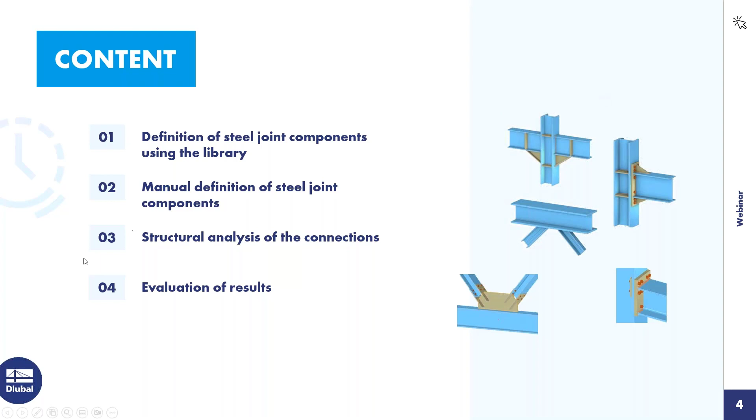For today's content, I will define steel joint components using the library, then define steel joints using components for flexible modeling of a joint. Then the structural analysis: I'll describe the analysis settings, and evaluate the results, for example taking a look at the submodel and the formulas. Then I turn to the program, RFEM 6.

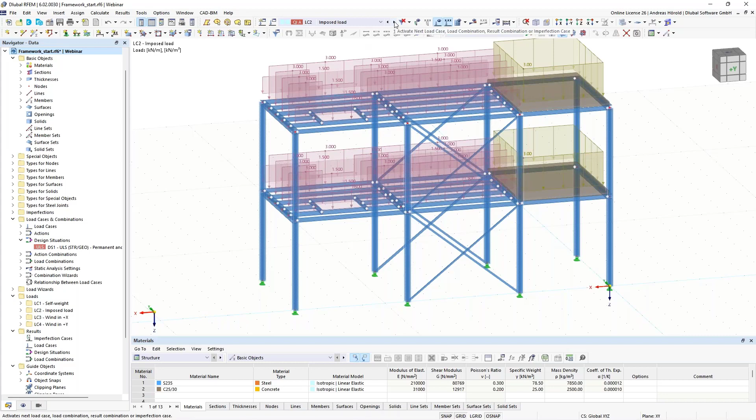A simple model: a framework with frames in that direction and bracings in the X direction. We have several load cases, for example the self-weight load case, the imposed load, and two wind load cases, one in X direction and one in Y direction. We also have several combinations and a design situation.

To design the steel joints, I have to activate the add-on here, left above, under base data. I open the dialog and under add-ons it's already activated, from my test. The standard is also already set here for the load case classifications and the standard and national annex, in this case for Germany, for the steel joint design.

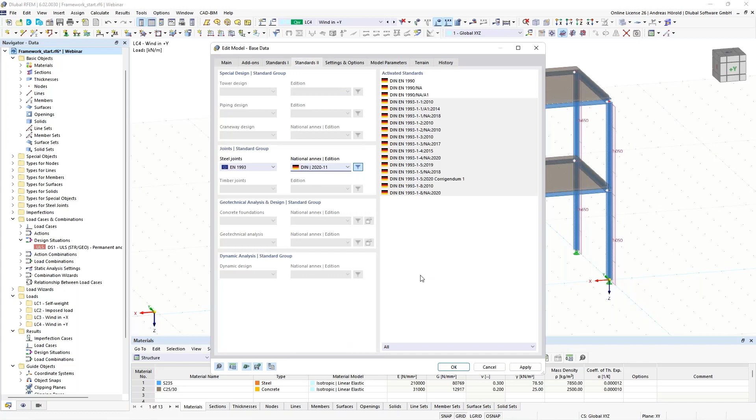Once the add-on is activated, there are two new folders: the types for steel joints, for the creation of the steel joints, and at the bottom, the steel joint design with design situations and ultimate configurations. I will show you that component, the ultimate configuration, in the next dialog.

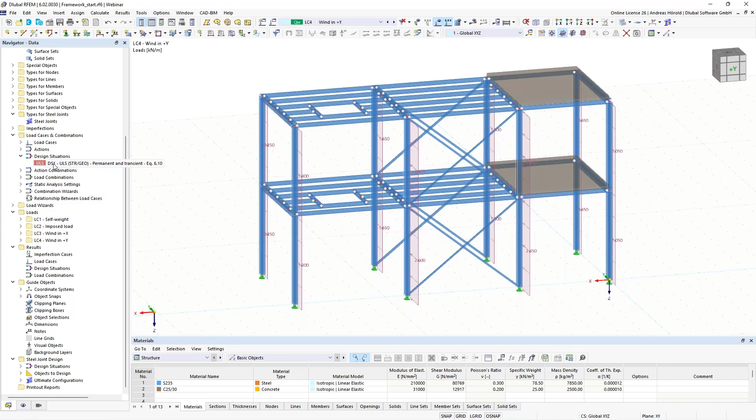Before that, I go to the design situations. You can see the load cases here, the actions, and the design situation. It's important: if you activate the add-on, by default the steel joints design is activated. Just note that it is here.

These are the action combinations and the load combinations, and those load combinations are included in the design situation. You can see that here in the overview.

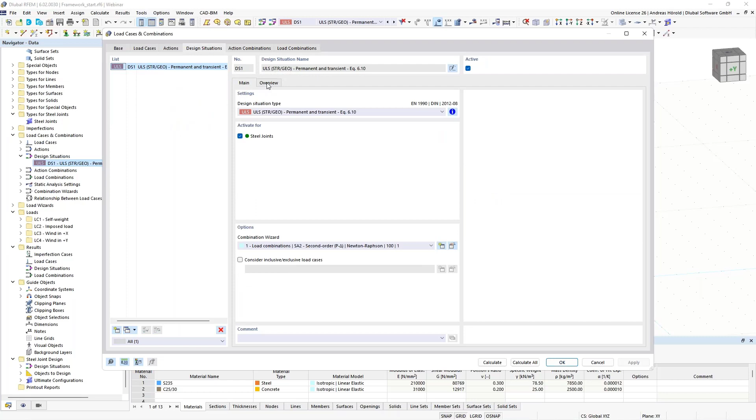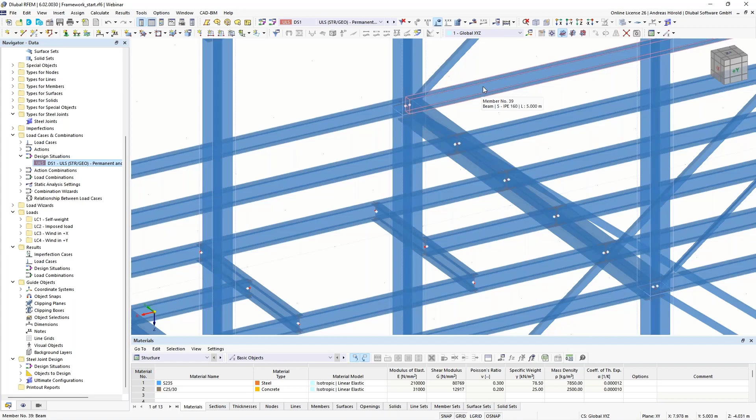So we can leave the dialog and start with the first steel joint. Let me show you that in the model. I would like to use this node, and I will define all connections for it: the rigid connection of the steel frame, the pin connections of the platform beams, and the two connections for the bracings, which are L sections.

Let's start. Right-click on steel joints on the left side in the navigator data, and select new steel joint. First I select the joint, the node, sorry. Node 33, and I apply that. There are 7 members that have their end or start point at this node. We can click through them.

Member 1 is the platform beam. That's the bracing, the frame or horizontal beam of the frame, the upper column, the lower column, the other platform beam, and the upper bracing.

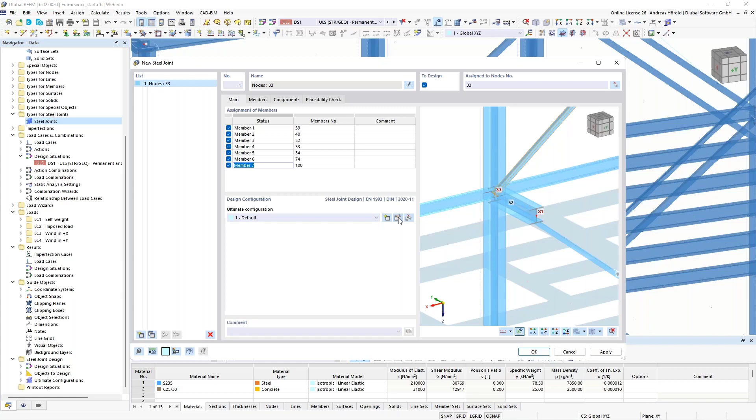Here you can see the design configuration. I open it - you can perform a buckling analysis. Then you can see the standard settings here, the maximum number of iterations, which you can increase. You can also increase the number of load increments.

That's the standard setting for limit plastic strain, that's the value from the standard, and so on. I leave all settings as they are, also the safety factors here.

If you want to perform a buckling analysis, you can go to that dialog. You can also increase the number of lowest eigenvalues and number of iterations. That's the limit load factor from the standard, it's 15 according to the Eurocode. For these connections, I don't do a buckling analysis.

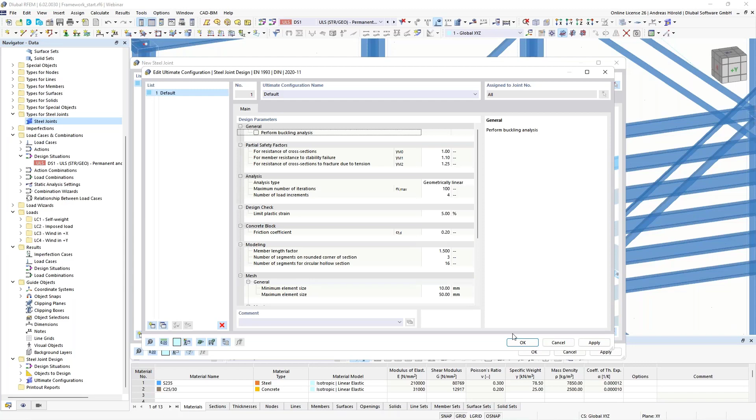Okay, then we go to the next dialog, members. The finite element analysis requires at least one member to be supported.

I select the lower column. The column is in reality supported here, and I will support at least this column. We define also that the column is continuous, and that's automatically overtaken for the two columns.

So the member settings, you can see here the member settings from RFEM, S235, and the sections, and we overtake the sections, of course.

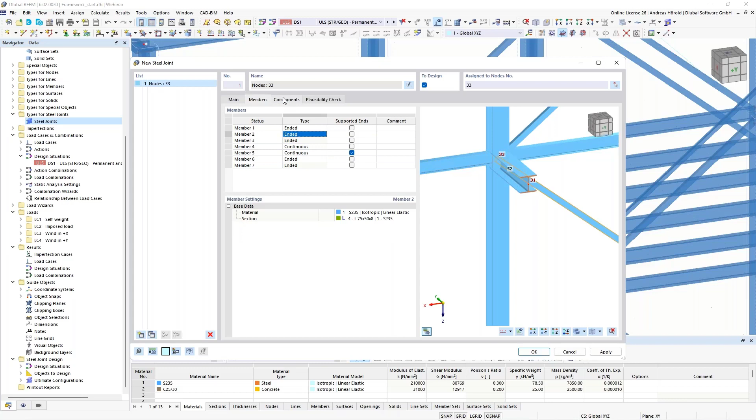So then under components, you can use the library and you can create single components. I open it. You can see 4 categories.

The modifications: member cut, plate cut, we will use both of them. Then the plate editor: plate, stiffener, haunch, and so on. Then under connection elements: end plate, fin plate. Under others: the auxiliary plane, a help plane, then the welds and the fasteners.

Yeah, that's the current state of that library. We will extend that library continuously. A team of 8 members or employees are working on the development of the add-on steel joints.

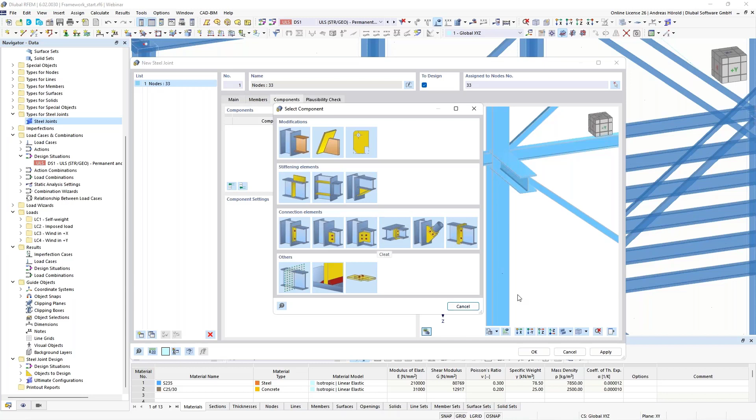We also extend the templates. I go to the template library. So there are also 4 general categories: the rigid connections, the pinned connections, truss, and the bracings.

I click through some examples: beam to beam, beam to column, with haunch, such a connection. If you download a trial version or you already bought the program, you can click through the single components. Maybe a cross joint.

Okay, I will show you some pinned connections: beam to beam with cleats, fin plate, short end plate, beam to column, the same, cleats, fin plate, short end plate, and so on.

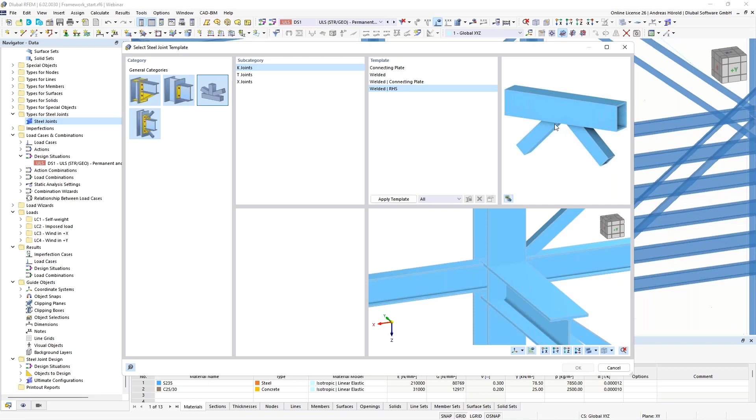Trusses, you can use that for diagonals or for bracings. The K-joint, welded, such a connection. Also for bracings to use welded, it's quite new. The rectangular cross sections with a weld, T-joints, X-joints, and so on.

Then last but not least, the bracings. Similar connection, such a connection.

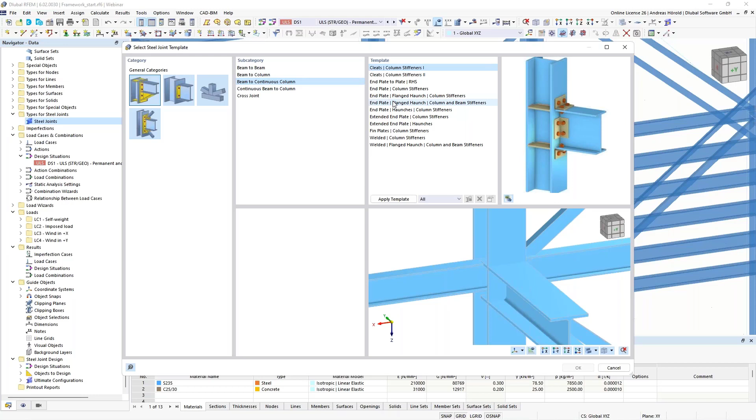But we will start with the first connection, the rigid connection. I use here the category rigid, beam to continuous column, and this one with a haunch and column stiffeners. If I apply the template, we will see it in the preview here right at the bottom. And you can see we have to modify that connection. We leave the dialog with OK.

And we go through the single components. So I extend the window a little bit. Okay, so then we start with the end plate.

Member 3 is okay, you can see member 3 is selected if it is chosen. Then the reference member is the column, you can see it's selected.

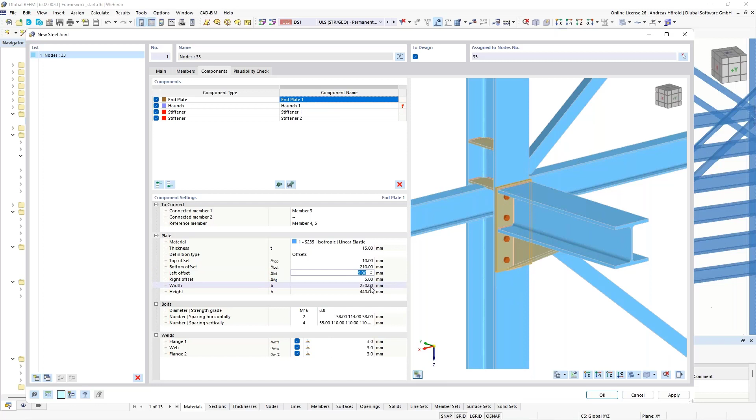We use a thickness of 15 millimeters, then 210 millimeters bottom offset. We don't need an offset, we say 0. On the other side also 0. The rest is quite okay.

So then the bolts, we use a diameter of 20 millimeters and a screw strength of 10.9. So then you can use our values here, it's quite okay for this connection.

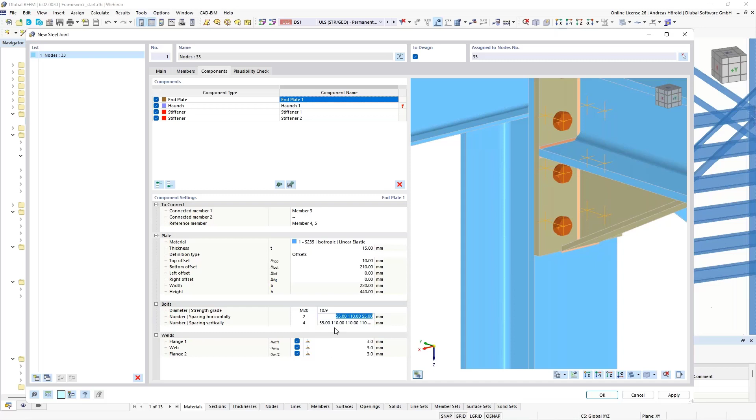I will only change the vertical spacings. I use only 3 bolts, and I only entered the first 3 values: 70, space, 95, space, 150, and the last dimension is calculated automatically.

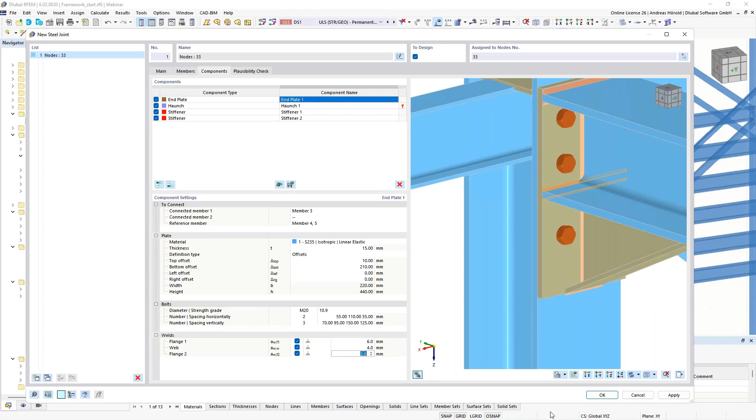Okay, then double fillet welds for the flange, 6 millimeter, then 4 millimeters, and also 6 millimeters. Okay, now you can see we have to modify the haunch. That's the next step.

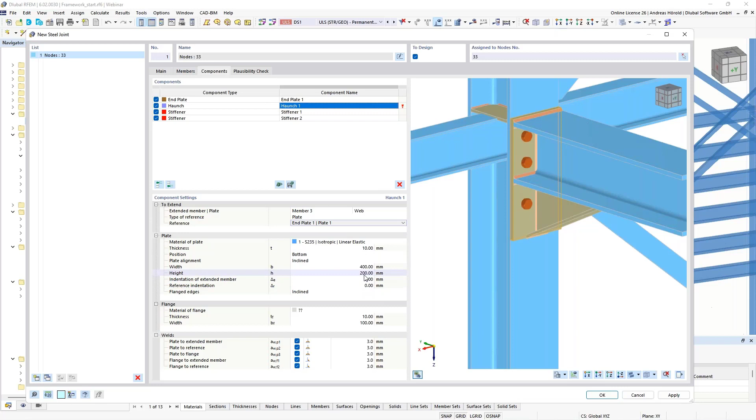So member number 3, that's okay. So then plate is also okay, and plate 1, that's okay. So the other values are also quite okay. I decrease that value, okay, and you can see now it's okay.

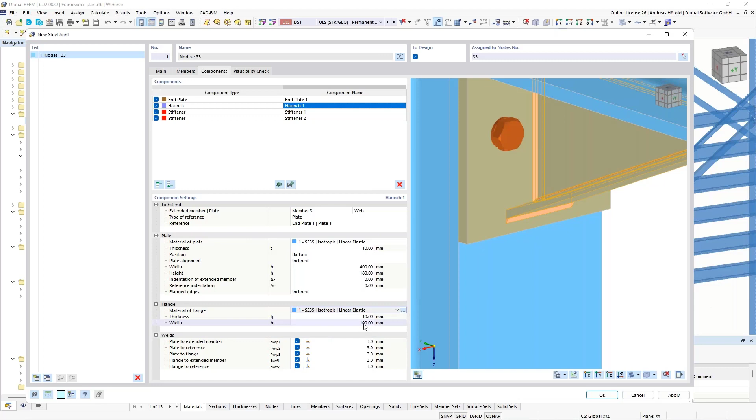So then I have to define a material for the flange, we use also the 235 steel. So then the width can be larger, 200 millimeters in that case.

So then the welds, that weld here, you can see it's selected, 4 millimeters. Now we can leave the double fillet weld. Then this weld also, the double fillet weld, 4 millimeters.

Then plate to flange, this one, also 4 millimeters. So then the flange extended member.

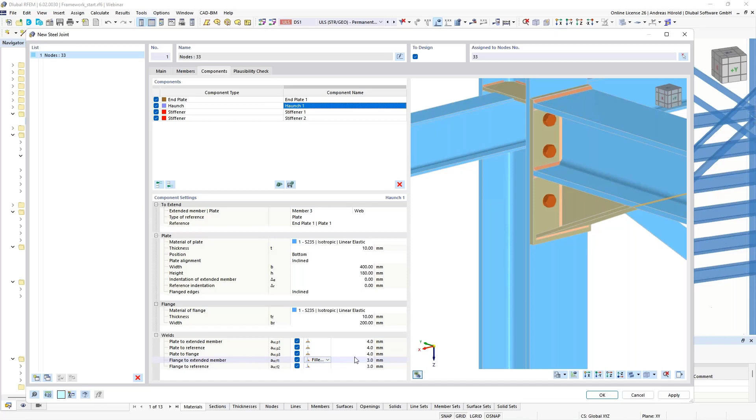Now this is this one. We use another weld, a butt weld rear side. And for this flange to reference, this weld, we use a double fillet weld. Okay, and 5 millimeters.

Okay, so the haunch is quite okay, but the stiffener not. So that stiffener should be quite okay. Let me check the values. Yeah, okay, I only defined a weld of 4 millimeters. But we have to move the upper stiffener here.

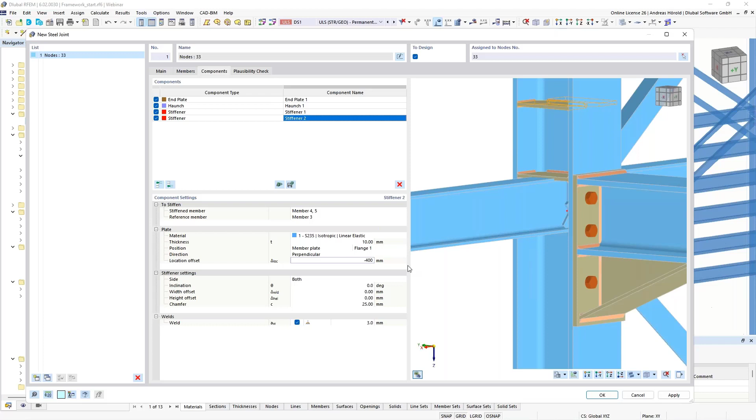So the value is minus 400. Okay. And I also have to change the weld. Okay, the rigid connection is finished.

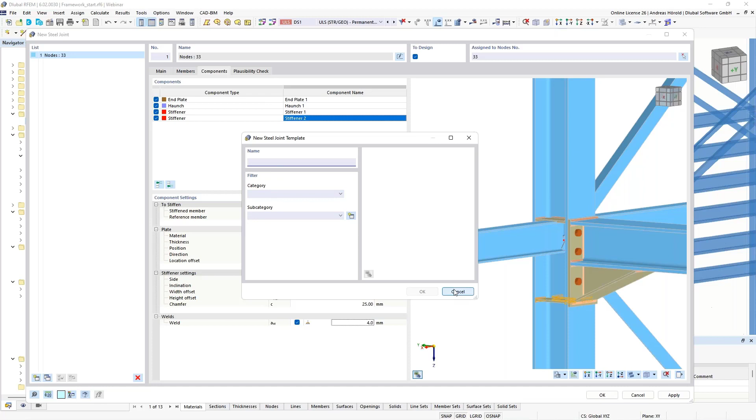And yeah, it would be possible to save it as a template, for example, to use it for the other rigid connections for the frame, for example, on the edges of the framework. And then you could press that button here, save component as template. You can give it a name, select the category and subcategory, and so on. Okay. I don't do that.

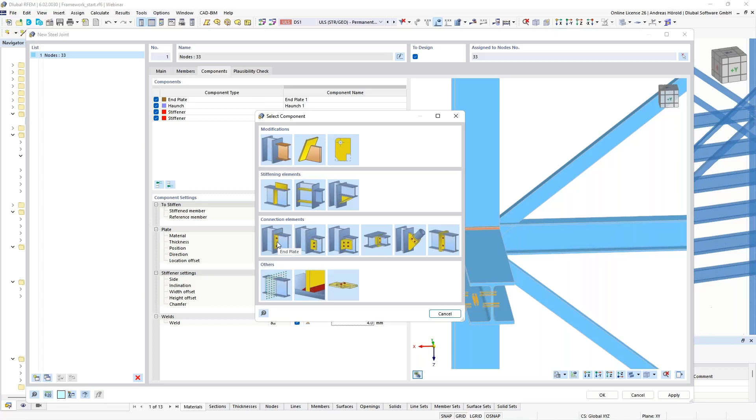I continue with the connection of the platform beam, of those beams here. So that's why I use a component at the end, an end plate, this one, end plate. So connected member is member 1, this one. And the other connected member is the member on the opposite side. It's member 6. And the reference member is the column, that's members 4 and 5.

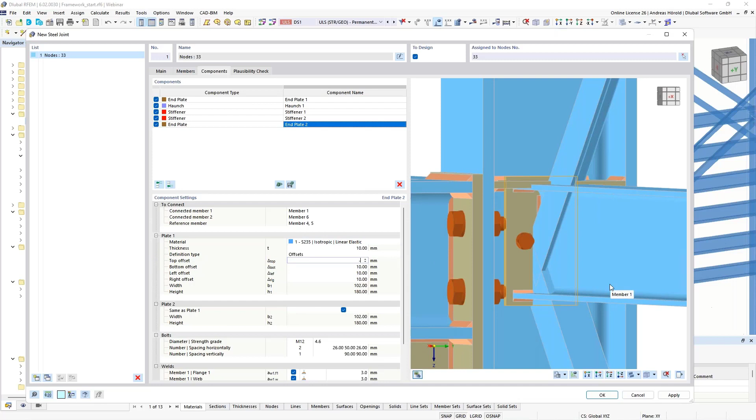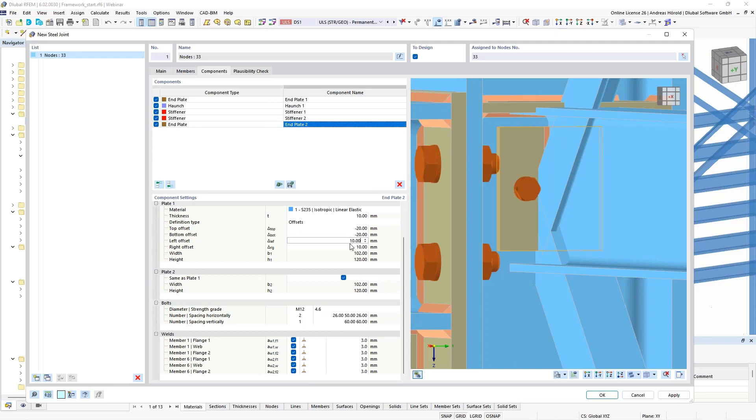Okay, now you can see the end plate. So same material. I decrease that value here. Now we don't want to connect the flanges. Also on the lower side, -20. Okay, the rest is quite okay. The opposite plate should be the same. It's on this side. Yeah, you can see it here. Okay.

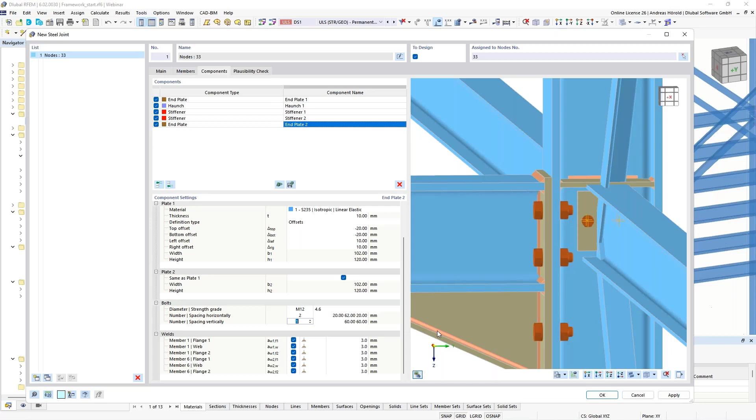So then bolts M12, it's okay. 4.6 as screw strength, it's also okay. Then I enter the value 20 and the rest is calculated automatically. So then I use also 2 vertically and enter the value 35. That's good.

So then we turn to the welds. We don't connect the flanges. Yeah, that's why we deselect our flanges. Only the 2 webs should get a double fillet weld. And the value is 4 millimeters. Okay. So, and now the 2 end plates are finished.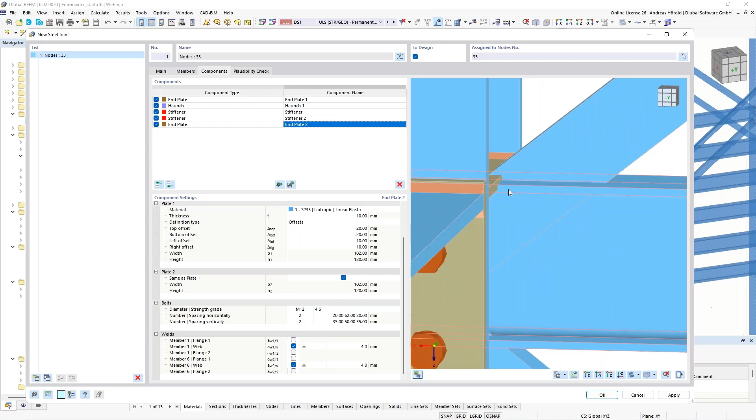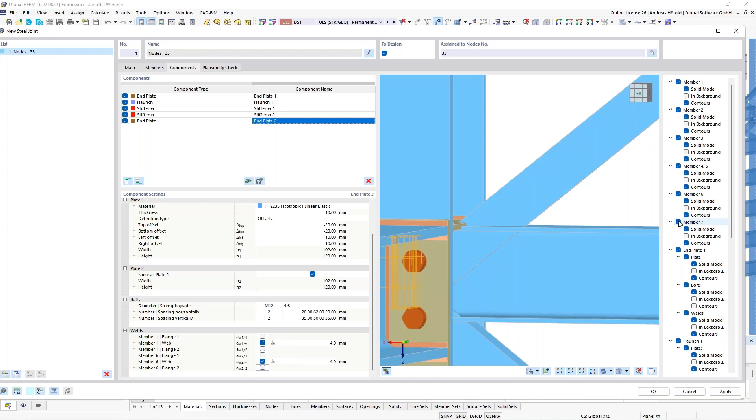Not yet, sorry. We have to add a cut here. Yeah, it's in conflict with that plate here, with the plate of the rigid connection. To get a better overview, with that button here, right at the bottom, I deselect member number 7. Okay. Now it's better to see, I think.

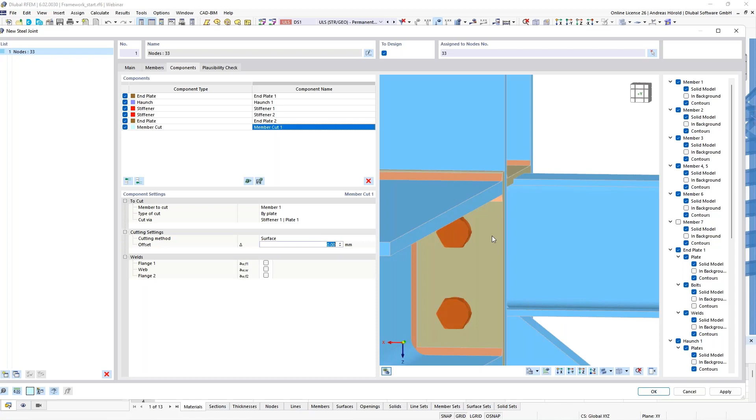So I add a member cut. Which member? Member 1 by plate. And cut via stiffener 1, plate 1, that one here. Okay. So surface with an offset of 15 millimeters. And now you can see the cut.

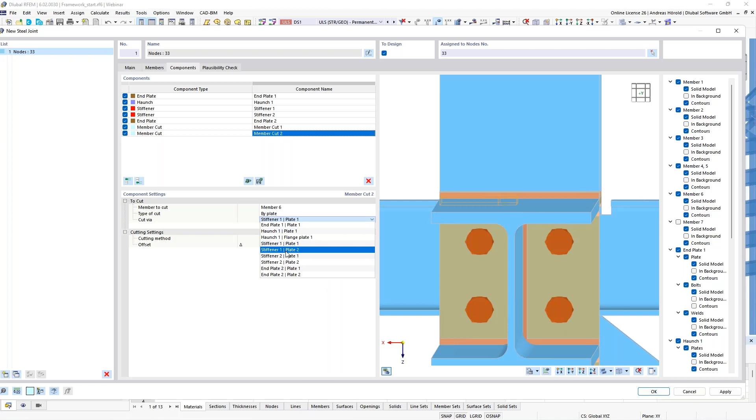Okay. To have it on the opposite side, I can copy that. That's also a new feature. By right-click, I copy the components at the end, only this one component. And I have to define another member. In that case, member number 6, the left side. And the cut is via stiffener 1, plate 2. So you can see it.

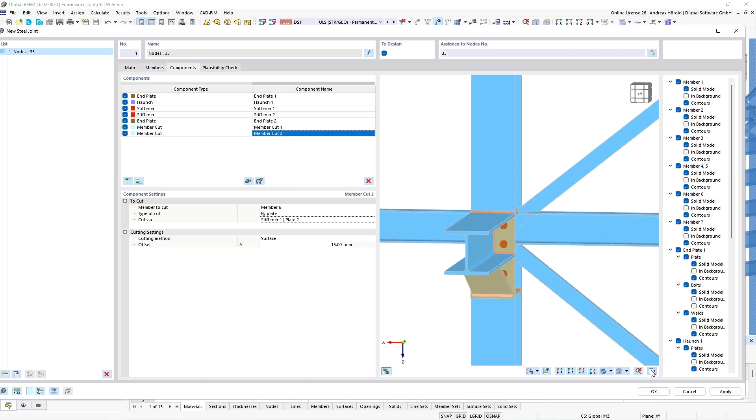So now the rigid connection is created and also the pinned connections, and we continue with the bracings. I select number 7. Okay, I can close it to have a better overview. So, since we don't have this component in the library, I have to create it with the single components. It's a little bit more complicated, but you can see now that it's very flexible. You can define almost all connections with the single components.

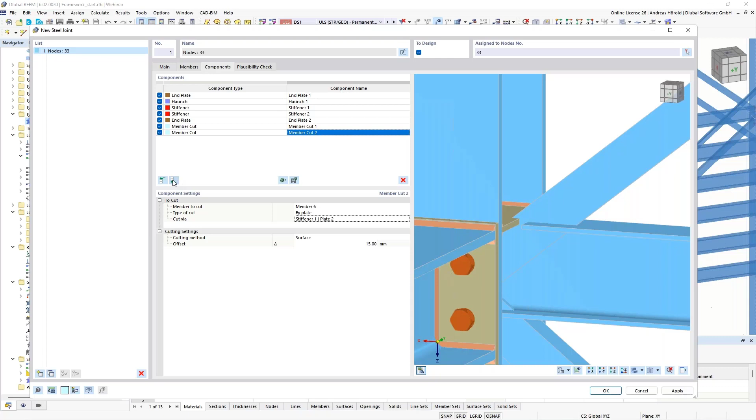So I start with a plate, stiffening elements, plate. So the material is S235 again. The thickness should be 8, then 250 and 170. And the position should be a member plate. And that's member number 7 and leg 1. And you can see it in the preview on the right side.

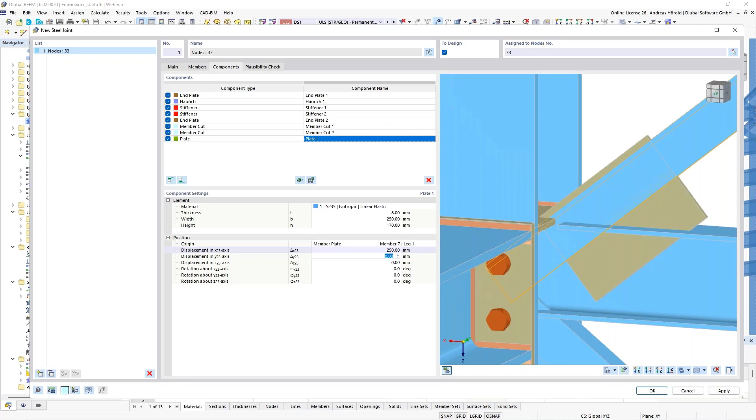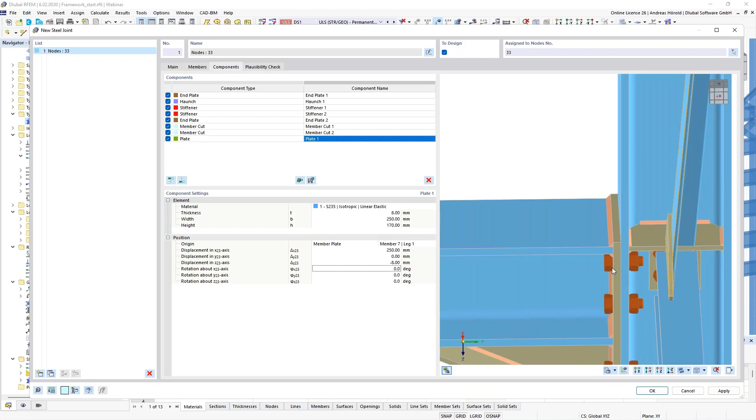Okay, but I have to move it a little bit. I use 250. Okay, and to have it on the side of the leg, I enter here -8. That's the offset of 8 millimeters. And you can see now it's not in the axis of the platform beam. That's the difference between the static model and the connection model. The axis of the L section is here, and the axis of the horizontal beam here, and the plate now has an offset.

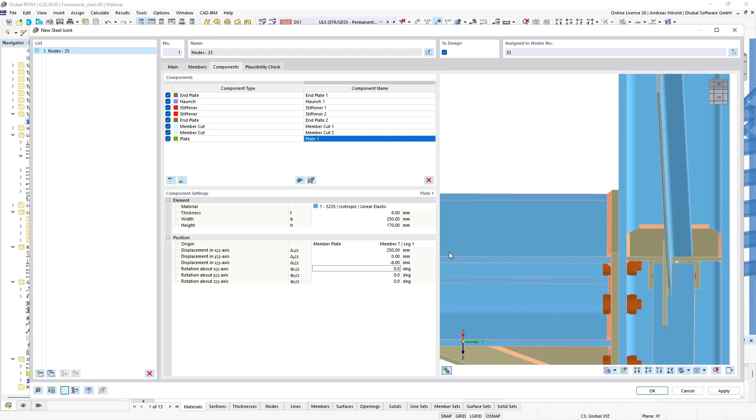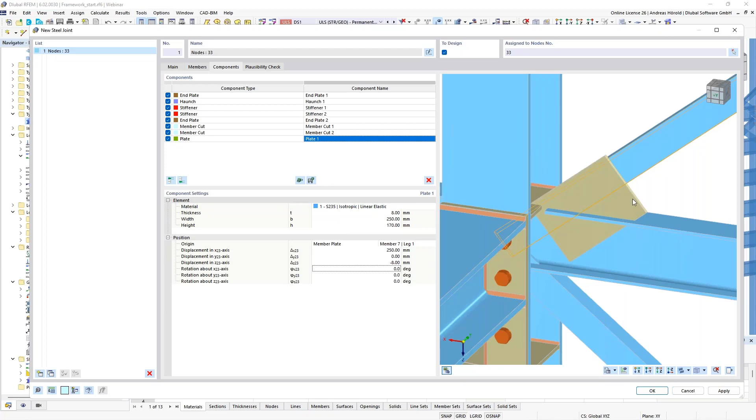You can avoid that if you define an eccentricity for the bracing in the FE model, or you can ignore it for the steel joint design. I ignore it for the steel joint design. It's up to you how to use it. That's the difference between the axis model in RFEM and the detailed connection model. Okay, the plate is not finished. We have to enter cuts.

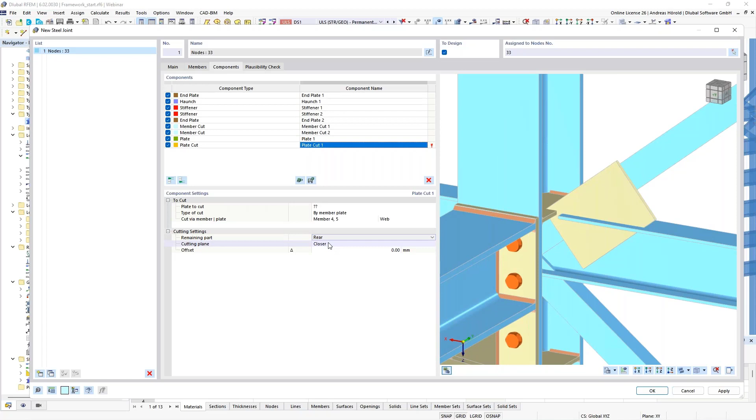I enter this plate cut. The plate is number 1. By member plate. Cut via, I select the column, and the web of the column should be the reference point. Okay, the rear side, closer end is the cutting plane. So we can do it step by step.

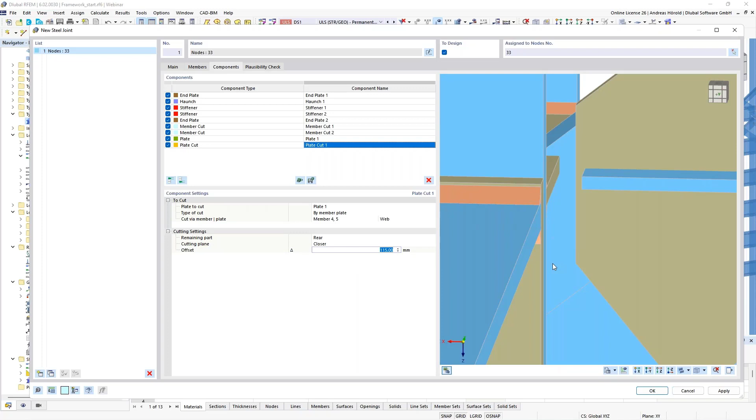No, that doesn't. It doesn't take the plate number 1. Okay. You can do it step by step, or calculate which is the right place. I would like to have the plate cut here at the end of the member cut, and that's 120.25. Okay, this cut is quite okay.

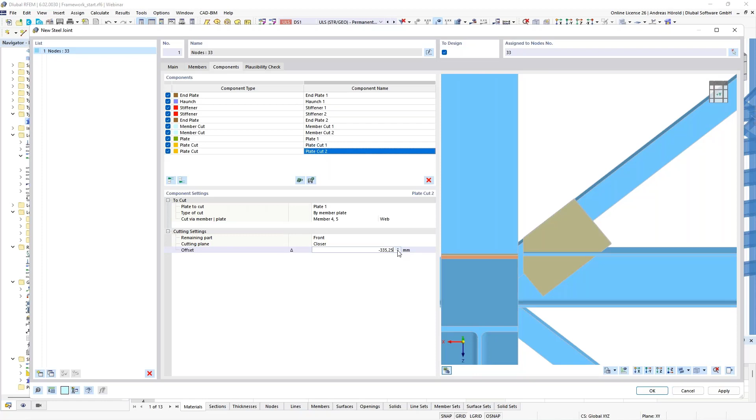We enter a new cut. So again, plate number 1 by member plate. That's the same again. Member 4 and 5, and the web. That's the reference point. Front, the closer end, and I enter minus 335.25. Okay. Only one cut is missing.

Plate cut. Again, plate 1. So now by member plate. And this time member number 1. You can see it selected. And the upper flange, flange 1. Okay. The rear side. Yeah, and that's all. I only have to enter a double fillet weld of 4 millimeters.

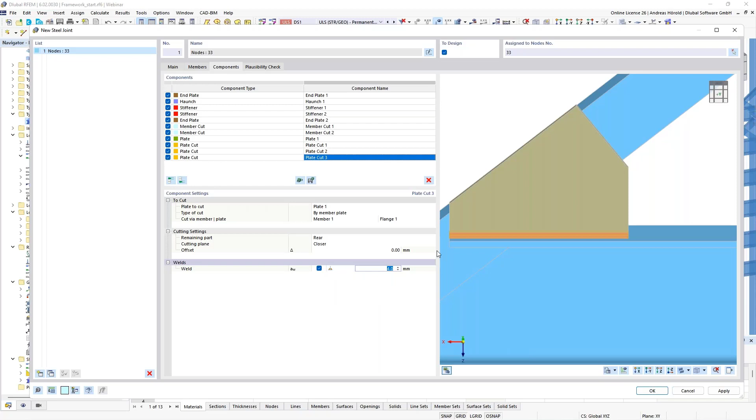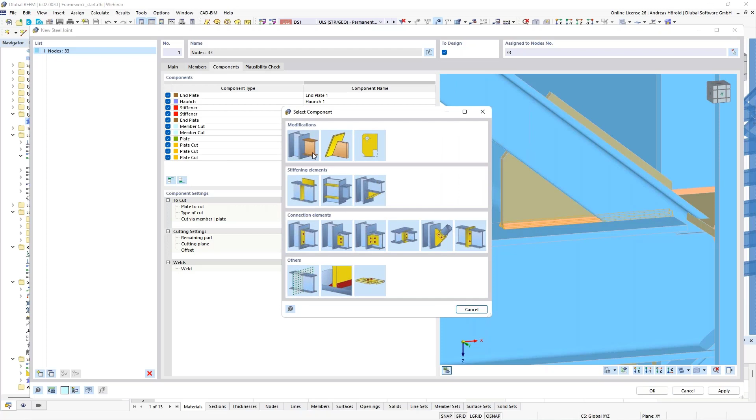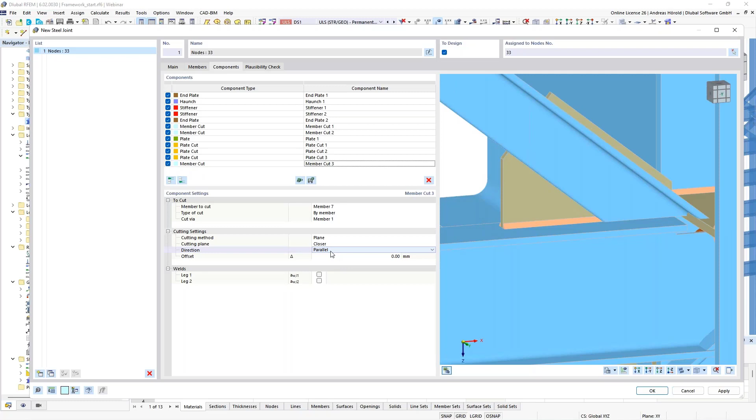So now we have to cut the member. Yeah, you can see it's in conflict with the other parts of the connection. So I enter the next component. Here left above a member cut. The bracing is the member number 7. By member number 1. That's the platform beam, yeah, the horizontal beam. Then it shouldn't be parallel but perpendicular. And a small offset. Okay.

So now we have to define the bolts, meaning fasteners. I add the component fastener. The component is member plate, member 7, leg 1. The other component is the plate number 1. So that's okay.

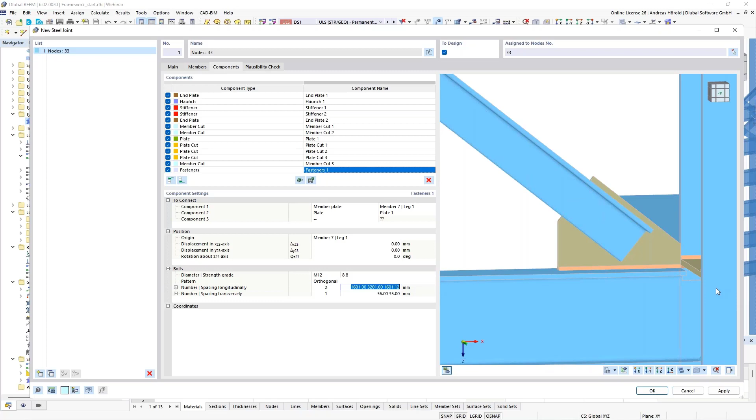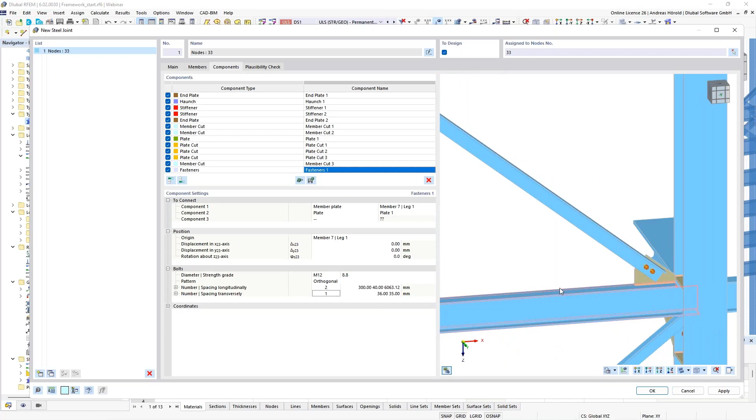M12, I use another screw strength. You can decide by yourself. I, for example, use 8.8 this time. So, and that's the distance from the crossing here. 300, then space, and the distance between the screws or bolts should be 40. And that's all. And now the connection for the upper bracing is finished.

For the lower bracing, we use the same function. I copy that. So I copy the last 6 components. I select all. Then I do right click and copy components at end. So now it's the same, the same connection, and I have to modify it. So that's plate number 2. I start with plate number 2.

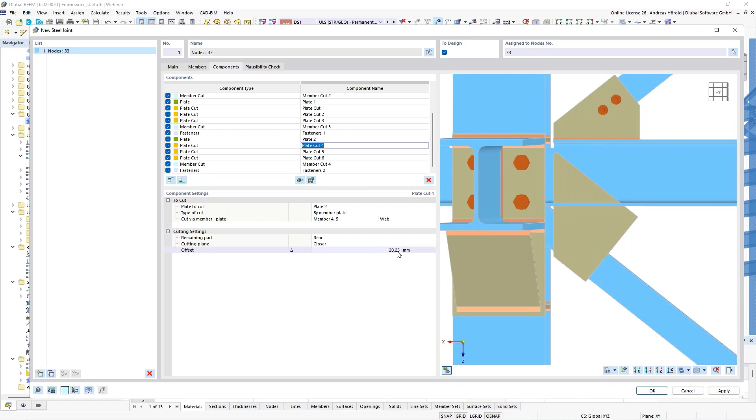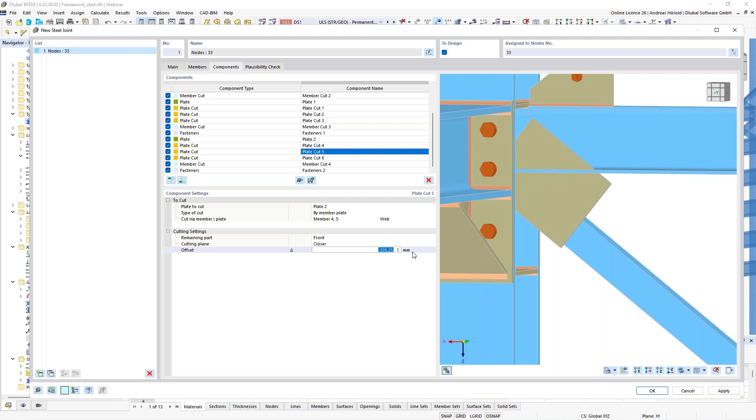Plate cut 5. That's also okay. Minus 265. And only this plate cut here, the flange, is missing. Flange number 2, the lower flange. Then the front side. Well, and that's all.

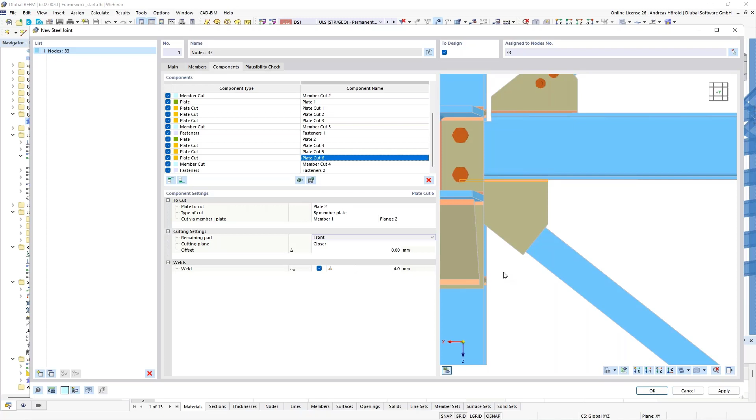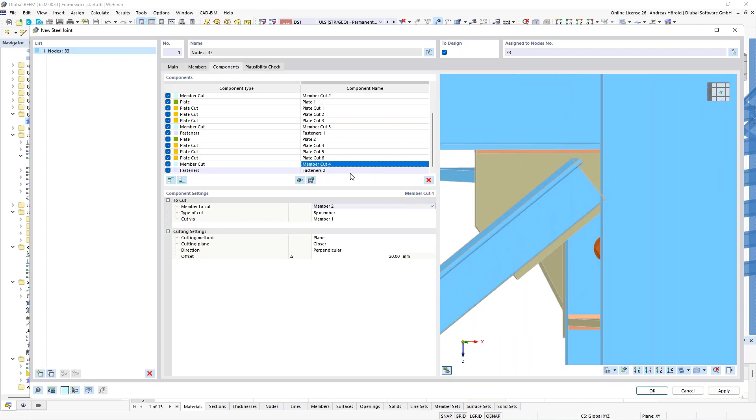So then the member cut, I rotated it a little bit, but you can see all. This time member 2. Yeah, and that's all. Only the fasteners need to be modified. Member 2, leg 1. So, and 200 space 40, and that's okay.

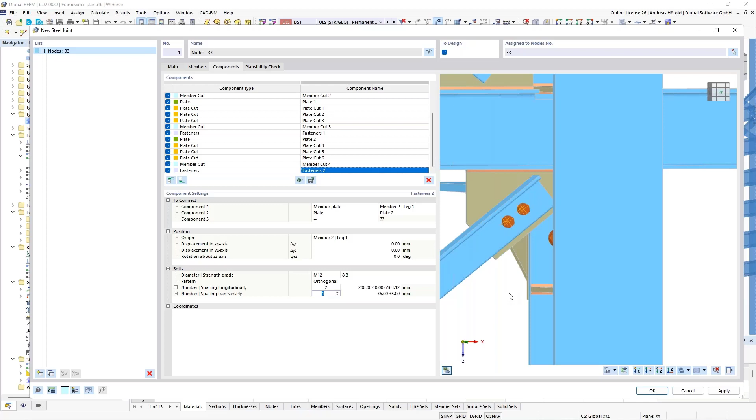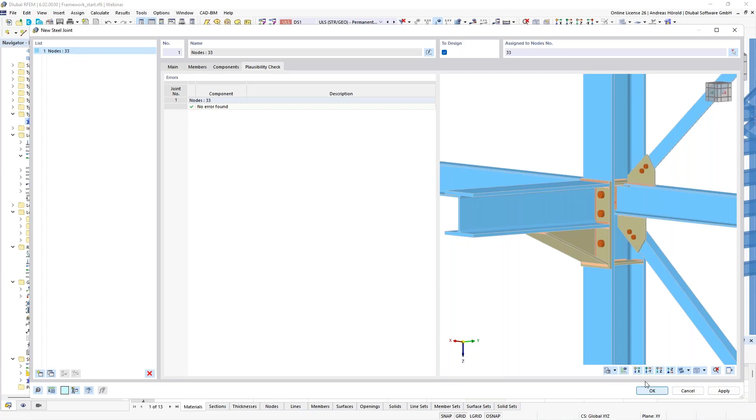So you can take a look if everything is okay, and you can do a plausibility check. Yeah, no errors found. Now that's quite good. Okay, I leave the dialog, and you can see the connection in the preview. If this button here right above is activated, you can also activate no joint model or simplified joint model. Now I will use that. So, and now I can also use that connection for the other 3 nodes here.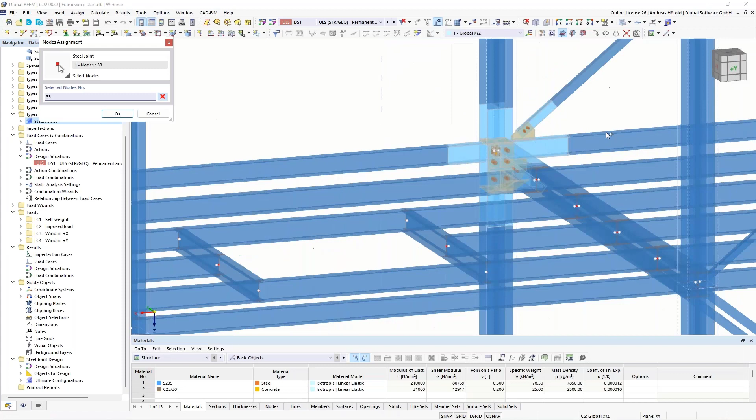So I can, for example, open the dialog by double click on the connection, and I can select the other 3 nodes. Okay, so I apply it. And now we have got 4 connections, 4 similar connections.

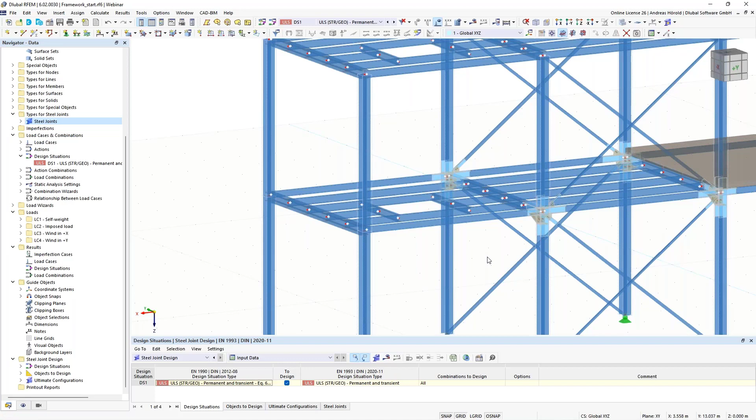So then we can open in the table here the steel joint design. And if I press that button here, the calculations would start. I skip the calculation. Yeah, the calculation time is about 15 minutes on my computer. I skip the calculation time and I open the calculated model.

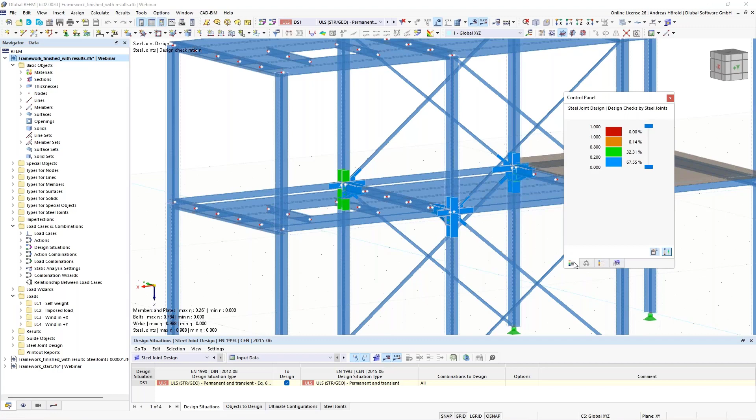I open the panel. So, you can see the ratios here graphically. That's the connection with the highest ratios. I go through the table, steel joints, stress strain analysis. You can see the design ratio by design situations, by loading, by joint, by node, by components.

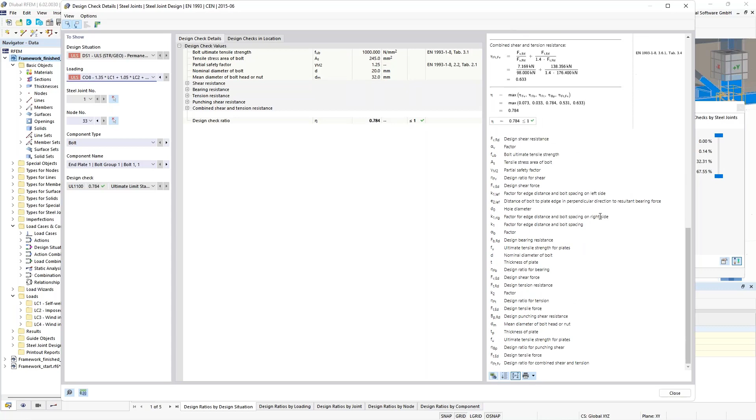Okay, if you go, for example, to that line here and open the design check details, then you can see all formulas from the standard for the bolts, also where you can find the formulas in the standards, and so on. You can also switch between the designs here, plate, weld, the welded design, and so on.

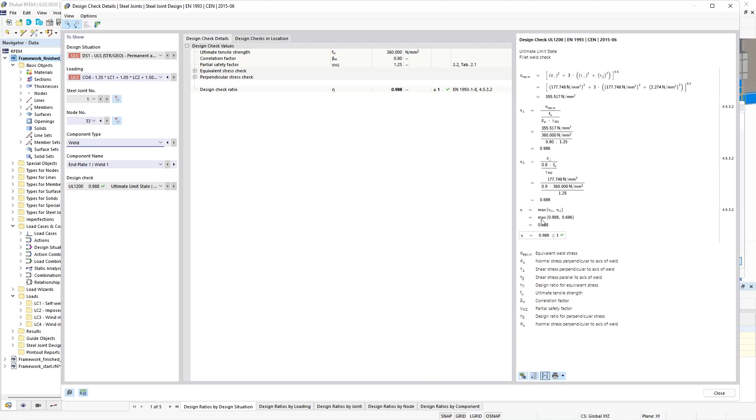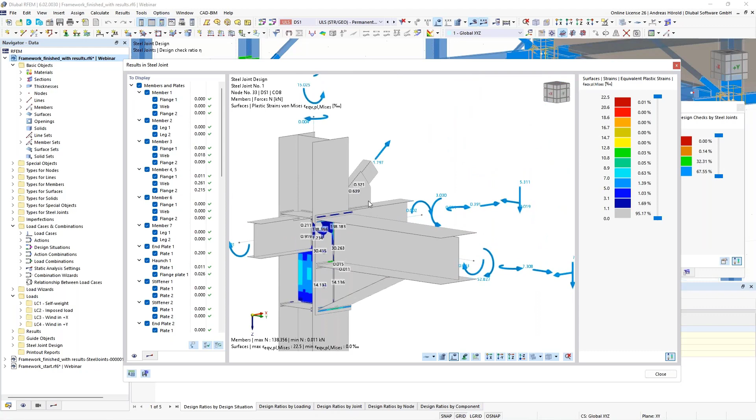Okay, then when you click that button, the results in steel joints, you can see the detailed model. So it's the whole connection. You can see the ratios here graphically. The gray area is a new feature for values that are not of interest, for example, very small values.

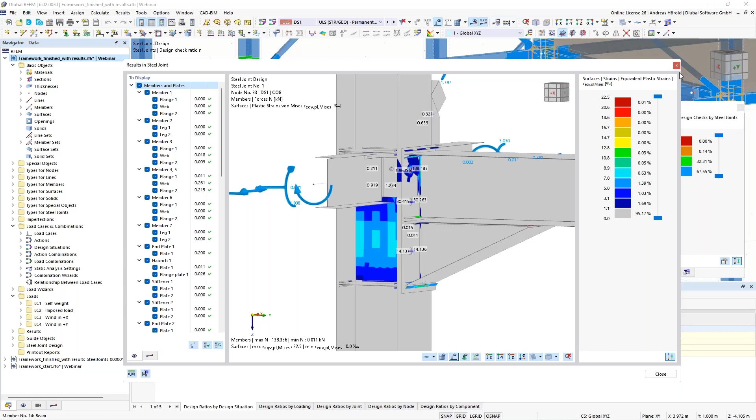You can click through the single components, deselect, for example, the members and plates. Now we see, for example, here the welds and the maximum design ratios. And you can go through all. So then you can save that submodel here with that button at the bottom left, and you can open it.

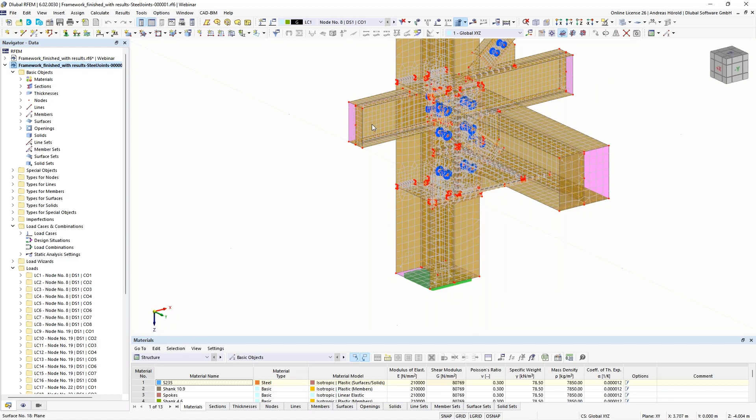And that's the submodel with surfaces, the supporting of the column, horizontal beams as surfaces, the bolts, the welds. You can see a simplified model with surfaces and rigid links here.

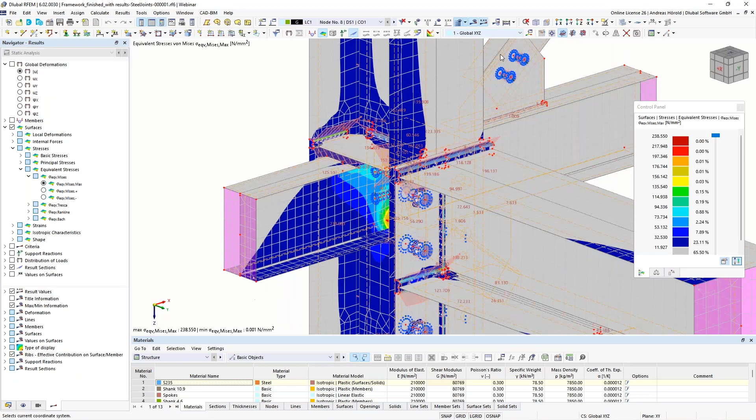Okay, then we can also take a look at the results on the surfaces. For example, here surfaces equivalent stresses, the sigma max Mises. Okay, and you can add dimensions here, and print it in the printout report. Okay, did I forget anything? Well, I think no. Okay, that should be all for this connection.

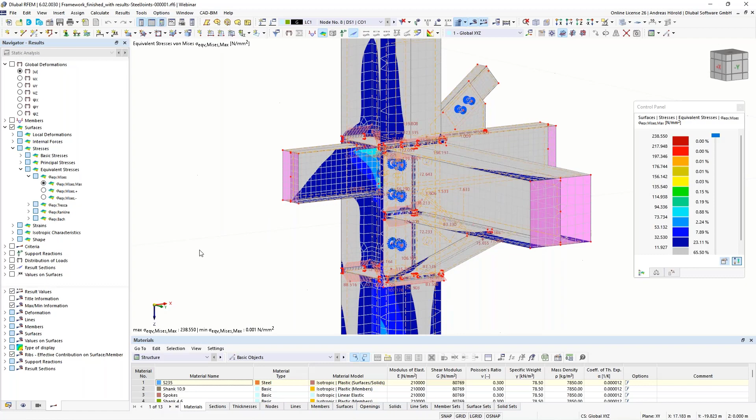I switch to another RFEM window with other connections that we already prepared. You can use the plates behind the flanges here for such a rigid connection. So quite new is the welded connection of rectangular hollow sections. You can see the weld on the fillet is missing. We are working on it. At the moment you are on the safe side. Only the straight components are connected.

We are also working on the implementation of the round hollow section, and when we release it, I think the welds on the fillets here are also ready. Also such a connection. Okay, then other connections are, for example, the diagonals for a truss. Here's another connection. It's not practical to use different connections on one truss, but we would like to show the different options in that model here.